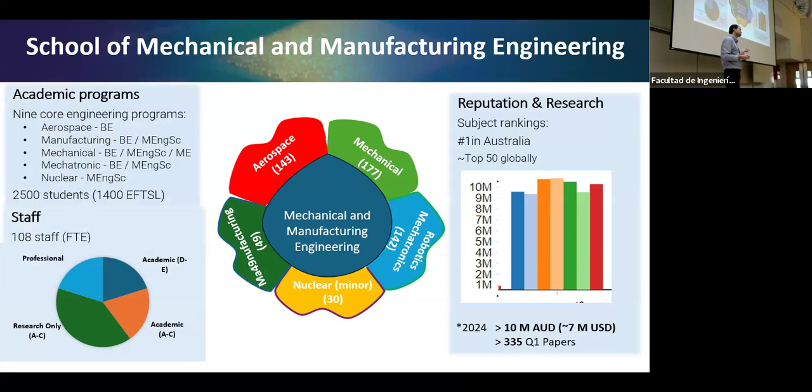It also turns out I'm the deputy head of school, so I'm sort of in charge of organizing the research for our department. I have to keep track of those numbers and statistics. We're also ranked highly in terms of our different subjects - these are the subject rankings. We're ranked somewhere in the top 50, 40 to 60 on average in terms of those mechanical engineering subjects, so that's pretty good. And within Australia, we're probably number one for mechanical engineering.

The way that our program works is interesting to compare to the Chilean system, which I heard used to be 6, 7, 10 years sometimes if people get delayed, where our degrees are 4-year degrees. The first couple years are fundamentals, and then people specialize within those different majors that I discussed.

We try to get students as much hands-on experience as possible, especially for mechanical engineering, where you should be doing some hands-on work, I think. The way that we do that is with big projects. So we have a lot of these student projects. Just a few of the pictures there.

There's a project now to build a nuclear fusion reactor, the top left thing. There's a rocketry team. We have students building robots, mechatronics students. There's some flight simulator thing, and all the students in aerospace eventually go and do some flight training. We have a Design, Build, Fly airplane team, a solar car, and a Formula SAE racing car.

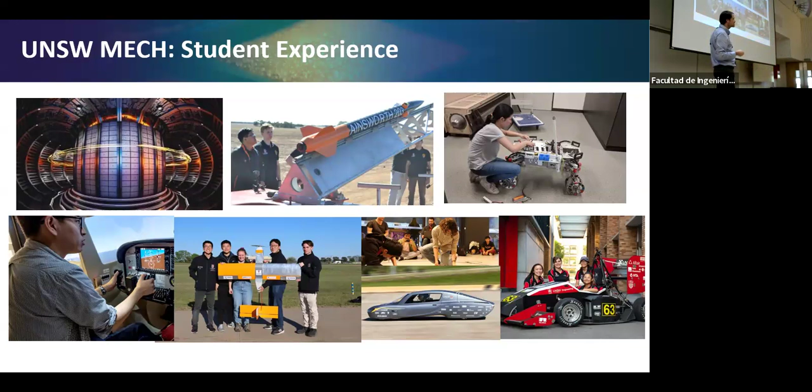The thing that I'm involved in most is the solar car. We had a solar car race last year. I went along with the students. We camp out in the outback of Australia. It took about 5 days to go from the north of Australia to the south. It turned out we got first place in our category, the cruiser class car.

You can't see it here, but there's solar panels on the top of the car. Mostly this car, because it takes passengers, is a larger, more regular car than those original solar cars. It's more like an electric vehicle, basically, but it does have solar to supplement what you get from the electricity off the grid.

The students build that themselves. They do all the carbon fiber, design all the parts, 3D print some things, doing all the manufacturing as much as possible on campus and sometimes with the partners. And then in terms of our research, we have a lot of partnerships with lots of industry partners.

Australia doesn't have wonderful industry in terms of doing research and development, but we do have a little bit, and there's a few companies interested in doing things which we partner with to advance their technologies. I think probably similar to Chile's industry, people just want to dig stuff out of the ground and make money, and they don't want to do a whole lot of development because it's easier to just do things quickly. So it is a bit of a challenge to get industry involved in research, but we do manage to get quite a bit from different things.

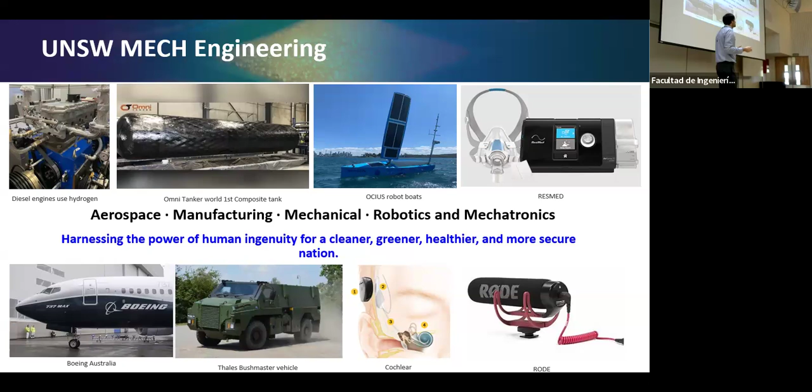But what I mostly wanted to focus on today was solar energy, and that's my area of research. My university is very famous for solar energy, especially with the photovoltaics department - they set a lot of world records in terms of photovoltaic cell efficiencies. Back in the late 80s, early 90s, almost all the silicon photovoltaic record efficiencies came from my university.

But there's been some more recent things in the last few years on different types of solar technologies, where we're still setting world records. In fact, almost all the researchers that were there back then—there's a guy named Martin Green, who's very famous—are still at the university, still supervising PhD students and doing stuff like that. And what people may not know so much, because it's not as famous, is that almost that whole time there's been solar thermal research, which is more like my area.

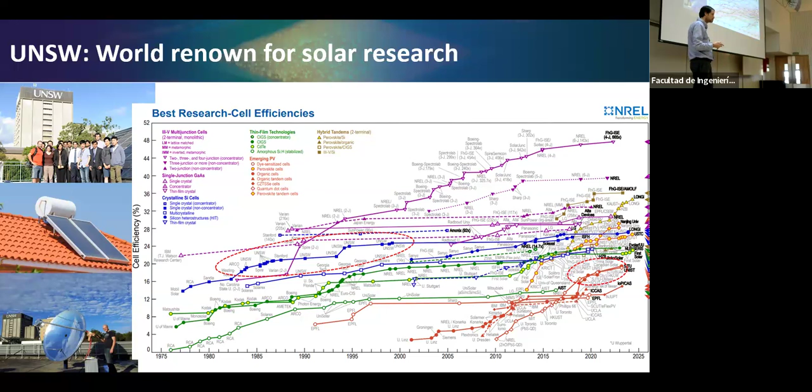There's been a solar thermal lab since the 80s there, and we have rooftop testing capability. We've tested all kinds of technologies, from low temperature things like making hot water, all the way up to high temperature materials processing things, which I'll show a little bit about later. So it's a long history of solar energy research, probably one of the most famous things at the university.

So the solar opportunity—the reason why I'm excited about solar energy, and hopefully after this you'll be excited too—is that it's a huge resource. Something like 10,000 times our global energy demand is available from solar resources right now. So we don't need to harvest even 1% of that resource, and we could grow our economy even more. It's interesting to think about, because if you think about fossil fuels, there's not a whole lot more room for growth. If anything, we need to stop using that energy because it's harming our planet. But with solar energy, we could keep growing and growing for generations and keep harvesting more of that resource. We've got 10,000 times more there to work with.

In terms of where those resources are, you guys here in Chile are very lucky—you have wonderful resources, a good place for concentrating solar thermal plants, solar PV plants, and the same in Australia. But there's one challenge: people don't necessarily like to live in the places with the best solar resources, because it's hot, dry, no water, hard to do agriculture. So I think even in Chile, this northern part of the country is not very populated. Most of the people are down here by Santiago.

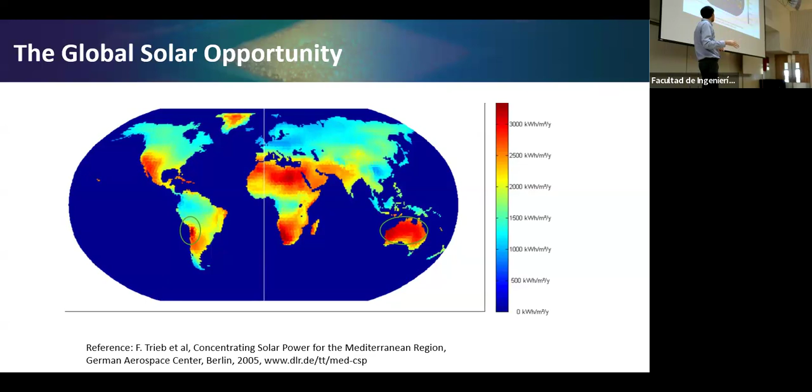So you're going to have to think about how to get that solar resource to the people, because that's where we're going to consume it. And definitely in Australia, this part of the country—all that red—looks so good, but nobody lives there. That's where our solar car race went through, and I can tell you there's nobody there. If your car breaks down in the middle of the country, there's no help coming for you.

And I think you can probably make a similar case in Chile—if it's a mining economy, why not mine the solar resources, put them into something you can export to people, maybe get things up into other population centers. So I think there are some good opportunities for solar resources if we can find good ways to embed that energy of the sun into things besides just electricity.

Most people, whenever they think of solar energy, think of electricity. But if you can embed it into some of the minerals processing steps that take a lot of energy, that's like exporting your solar energy. Or if you can store it in some kind of fuels—this last week I was at a conference where a lot of the talk was on hydrogen and ammonia. If you can put solar energy in and produce those fuels, you can then transport them and sell them somewhere else.

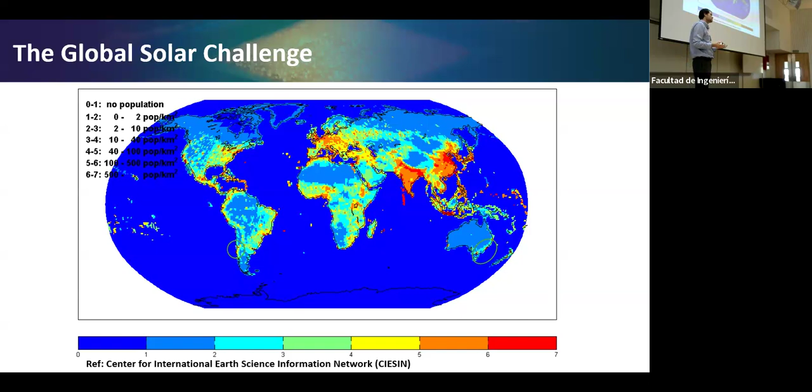So they're thinking, again, Australia is thinking to make hydrogen and transport it up to Korea and Japan. I think that's a great idea, but it takes a lot of research and science development to make that stuff happen. So I'll tell you next about some of the work I've been doing in those areas, and maybe some of the collaborations I think could be good between Australia and Chile.

So we had this project for the past few years. It's sort of finished now, but our idea was to use some biomass that's readily available in Australia, which is sugar. I think another product in Chile is the sugar industry, right?

In Australia, we have a big food and beverage industry which takes sugar in, and there's a lot of waste sugar in their waste streams from these plants. And of course, we have solar resources. So if you can take that sugar biomass, sucrose, and solar energy, and eventually turn it into something more valuable that can be transported as a fuel, then you've got something interesting.

So this project was trying to figure out the best way to do that. What we came up with was a two-step process. The first step is a thermal process. But before that, you've got to collect the sunlight, so we did a little bit of development of the solar collector. Then there's a thermal step and an electric step, and both of course could be powered by photovoltaics. We thought it would be easier to control the processes if we did that.

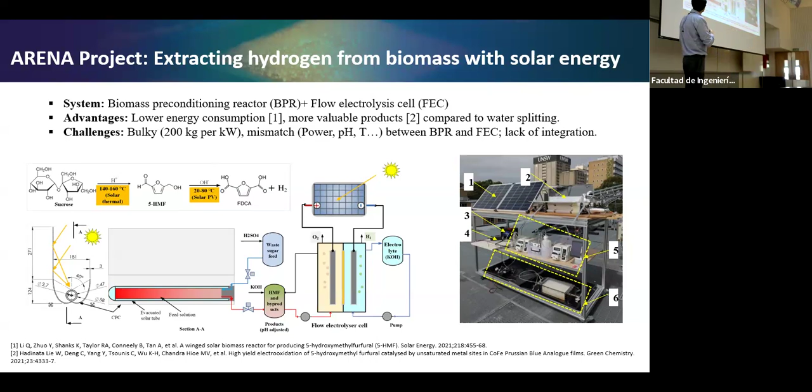There's some papers I'll be citing along the way. So I'll just take you through a little bit about the design of each of those parts.

The first part of it, which is mostly my area, is the solar stuff. What we realized was, to do this thermal process, you have to get up to a medium temperature - about 150 degrees is a good temperature to get that thermochemical reaction to work. To get to 150 degrees, you need a little bit of tracking and concentration of the sunlight. But we didn't like the idea of using standard stuff with 2-axis tracking, because it would be expensive and hard to integrate. So we went for this unique design, which we called a winged CPC.

So the CPC is a compound parabolic concentrator. The advantage of a CPC is that within a certain acceptance angle, all the light that comes in from any angle - as the sun moves through the sky - as long as it's within those acceptance angles of the CPC, it'll bounce around in these mirrors and finally make it to the tube receiver at the end. You can see some ray tracing results here, where we simulate the sun in a model, send some rays down, and it bounces off the wall, bounces over, hits the tube, and gets absorbed. It doesn't matter, as long as it's within that acceptance angle, it still works.

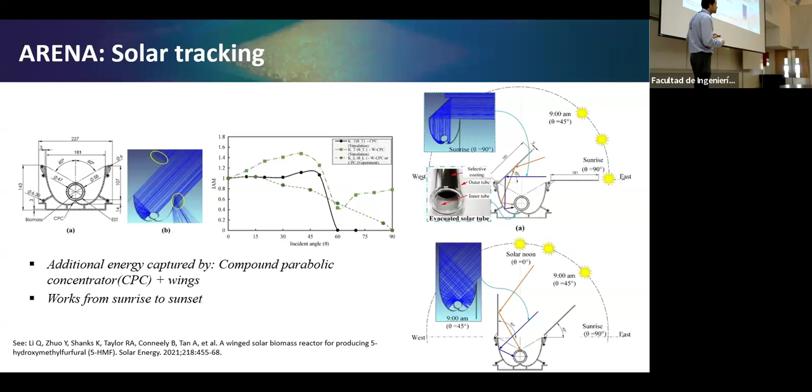So then the next step was doing the chemical testing, thermochemical testing. We put this thing out in the sun. So that's kind of what it looks like now. You see blue everywhere here - that's the color of the selective surface in the tube.

If you look down from straight above, it looks huge, but it's really just a small tube that you're seeing, and all the light is going into that tube. Then we put the sugary biomass, the Coca-Cola, into the tube. Unfortunately, one of the key things about this is it's an acid

catalysis process. So you have to put a pretty low pH in there for this process to work well, or at least to get to the lower temperatures. So it's a pretty strong acid.

Also, it needs to be pressurized because we're going above 100 degrees Celsius, and aqueous Coca-Cola will boil normally. So we put it at 5 bars pressure.

So anyway, we thought we could just do that inside the tube, and the manufacturer said you could just pressurize the tube, but we were cracking some of our tubes. So we had to redesign it a bit with a titanium U-tube, which holds the pressure on the inside. But anyway, we did some tests.

It turns out that over time, of course, the thing heats up and you go through lots of chemical reactions. So you actually have to stop the process somewhere along the way at the right temperature and the right amount of time to get the maximum amount of this 5-HMF, which was our target product.

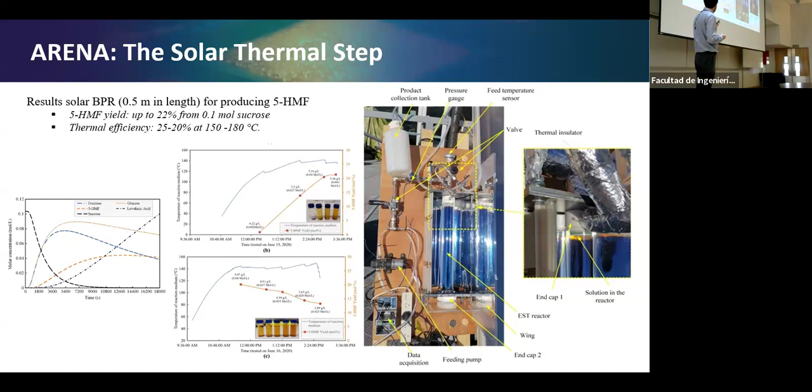I think you could get the yield up quite a bit. But the thermal efficiency, 25%, that's a little bit low. It's not bad for this temperature, but that's of course accounting for the whole solar resource as the denominator of the efficiency, and then the useful heat extracted as the numerator. So yeah, anyway, that's the result.

The next step, once we have what we want, which is this 5-HMF, we can flow those products into this flow electrolyzer cell. And inside of that, if you want to be off grid, it turns out to be an electrical engineering challenge where you've got to get a match between the photovoltaic current and voltage you're getting from the photovoltaic cells and these electrolyzer cells.

The electrolyzer cells would like to have very high current, and photovoltaic modules normally give you very high voltage. So what you have to do to get a closer match is put the PV modules in parallel, and then put the electrolyzers in series. If you do that, you can get it to be pretty close, because you want to get towards the maximum power point of the photovoltaic modules, and you also need to get enough current into these cells to make them work.

Also, whenever you put in that 5-HMF, it's actually a lot lower energy, about 25% less energy than just trying to split water by itself. So there's an advantage to doing this, a big energy savings, to have that intermediate chemical in there.

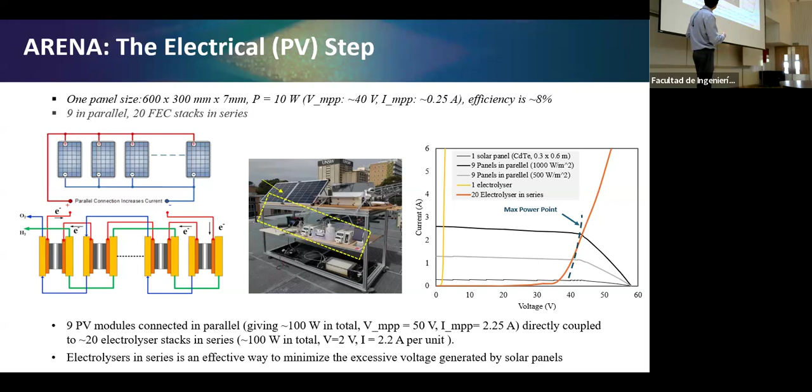Anyways, that's the design for that. Of course, the parts of that, like the stacks, can be down below - they don't need to be in the sun, just the PV module needs to be in the sun. So it's kind of large, a big cart, but you could imagine making a nice product that was all integrated, with the solar out on top, and everything else inside a controlled cart for environmental control, because there's a lot of electricity in there.

We only tested on sunny days. If you were out in the rain or something, you'd need to be protected from the wet weather.

So the overall results of this is basically we built this kind of prototype system, which was about 2 square meters, 300 watts of thermal input, 100 watts of PV electricity, and then it all was matching and giving a nice kind of continuous product.

There's a paper on it if you want to know more details. But it turns out it's pretty interesting engineering design - we didn't think of all the stuff when we started. We just thought, oh, this will work. But actually, when you get into the details of stuff like this, you have to do a lot of redesigns and a lot of playing around with different configurations, and operational conditions are very important.

So in terms of the economics, we did a little bit of economic analysis, which is in this paper. That FDCA is the most valuable thing. You might also get paid to take that waste, sucrose, because it's a trade waste that they have to pay to dispose of.

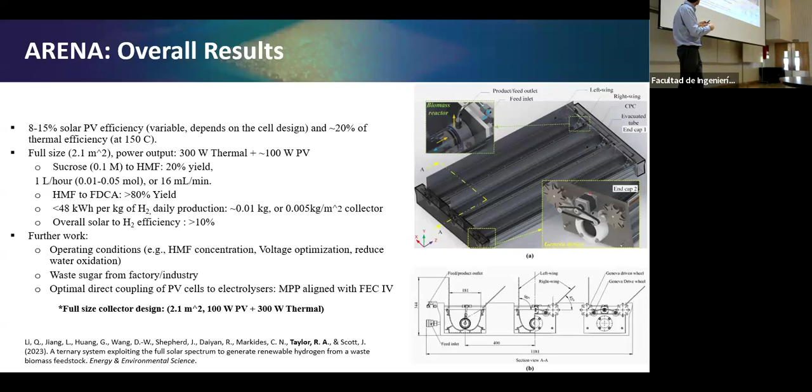Okay, so you may have noticed the way that system worked was the thermal system was separated from the PV. Some of my work, a good amount of it over the last few years, has been trying to bring those things together and make the PV and the thermal integrated. So I'll probably talk about a few ways that could work next.

So why would you want to do this? Well, the first reason is that if you think about a PV module - I don't know if any of you guys know much about photovoltaics - there's a certain band gap. So for silicon, 1.1 micrometers is the band gap. So anything that's lower, any of the photons that are lower energy, which is the infrared part of the spectrum, they won't do anything for you for your silicon PV module, and they just kind of, if they get absorbed, turn to heat.

Then for the short wavelength stuff, like the blue light and the purple light, it has way too much energy for that band gap. So when you get to blue light, you actually have 3 times the amount of energy that you need in that photon to make the electron jump across to the conduction band. And since it's 3 times as much, only one part of the energy is going to creating electricity - the other two parts turn to heat in a process called thermalization. So basically, only the red part of this curve is good for the PV.

The rest of the solar spectrum, which is landing on the ground, just turns to heat anyways.

So that's 80% of the solar energy landing on a PV module that's just turning to heat. So why not capture that heat? That's kind of a theoretical argument. And where does it make sense?

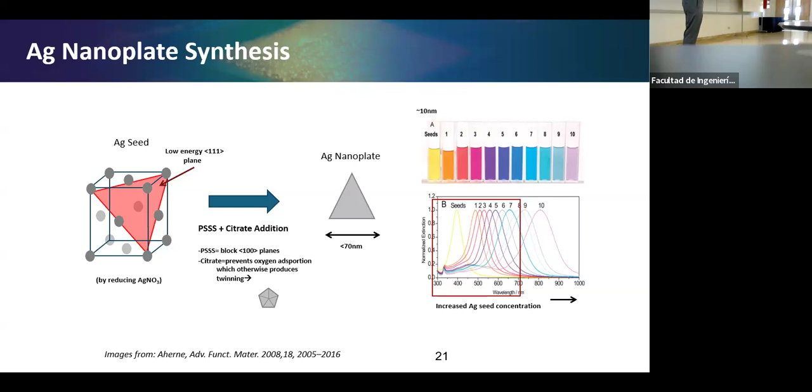There was a good PhD student from material science working on developing these, and you've got to stop the reaction at the perfect point. It turns out you want something kind of pinkish in color in the end. We started with little batches of these things and eventually scaled it up to make several liters. Of course, a lot of science went into the temperatures, times, and concentration of the reactants. Eventually we got something we thought was good enough to test in the sun.

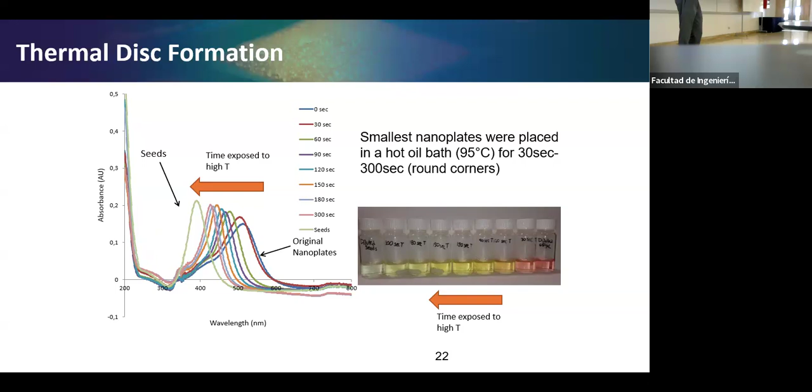Again, a lot of design went into this. We had to develop some of our own electronics to do the IV testing of the PV cells. It turns out you have to cool the PV cells because of the concentrated light on them—you don't want them too hot, or efficiency goes down. Designing this whole thing and tracking it out in the sun was good work for a couple of PhDs to develop and test that system, and we got very good efficiencies out of it.

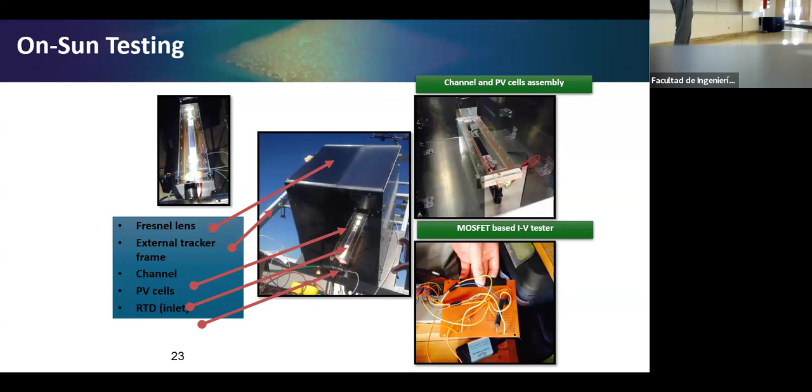So the next bit of work, ongoing now with a master's student, is to use almost the exact same technology, but maybe make a spot focus to get an even higher concentration ratio instead of a linear focus, and then spread the light back out so it's one sun again for the PV module. Then we can use a regular PV module at 20 cents a watt, and get an even higher temperature from the fluid. So we're designing this little receiver, which is going to be kind of circular. It turns out we want to mix up that fluid and make it all the same temperature. We don't want any hot zones, and we definitely don't want to crack our window or have a lot of heat loss.

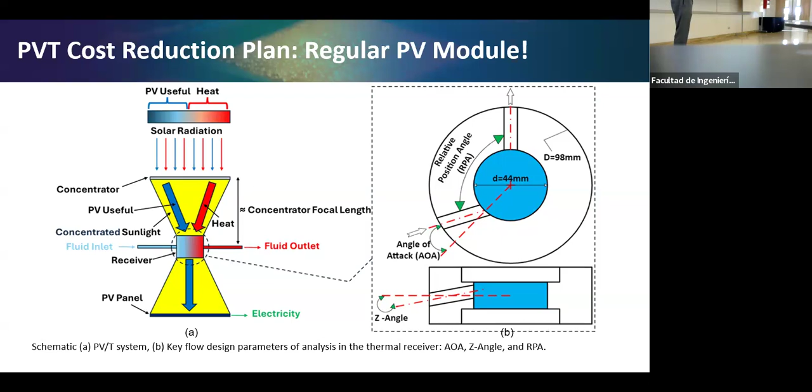So then there's a bunch of design choices, like the inlet. If you take the fluid and flow it straight through the middle of a circle with sunlight coming in, you get some dead zones on the sides that are hotter than other parts, and it's not very good mixing. If you put it at 90 degrees, you get some swirling and mixing, which is good, but it doesn't always do what you think it's going to do. We've been doing CFD, computational fluid dynamic simulations. Another important thing is the angle of the inlet - you want it to hit the window first and take away the hot part of the fluid that can get stuck there.

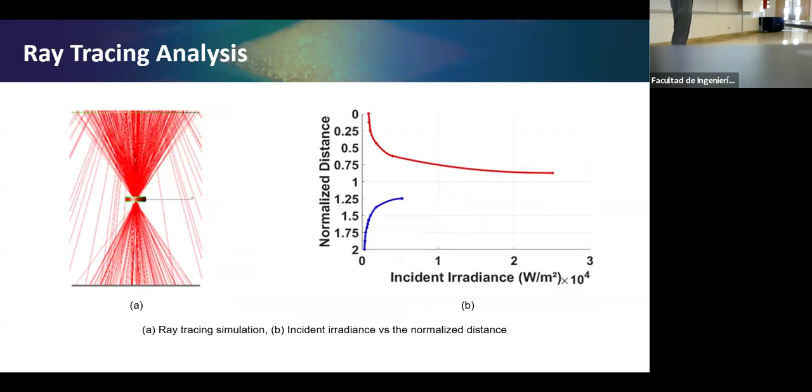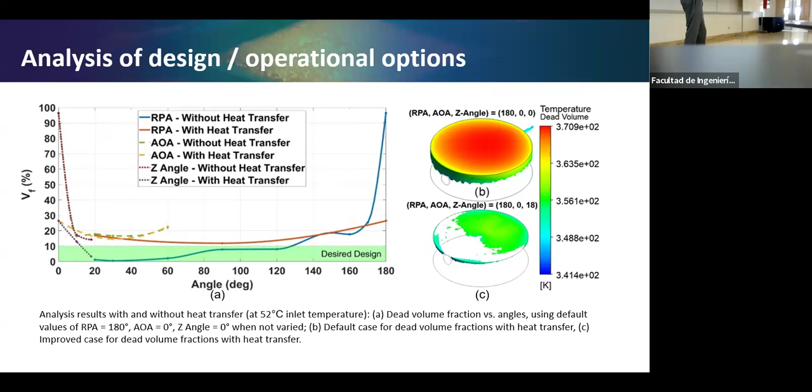So we've been playing around with different designs trying to come up with an optimum, and the next step is building the rig to test this. This is ongoing work - we haven't got test results yet, but we're building a very similar rig to what I showed earlier with the concentrator, and we'll put this in the receiver, with a PV module down below.

Okay, one last project idea we worked on with another PhD student, still PVT, but this time for the thermal part, is to do some minerals processing. We had a project on a big minerals processing industry in Australia: making aluminium. You start with bauxite, the raw ore, and turn it into alumina. That process has a high temperature step, a calcination step, needing about 700 degrees Celsius. You're really just stripping out some hydrogen and turning the bauxite into alumina. There are a lot of interesting parts of that process, but one thing is if you go very fast with a high heating rate, you can make certain phases of alumina which are more desirable.

If you go too slow, you get on another track and you get less desirable phases of alumina. So we're after the gamma phase alumina, not the alpha phase. Anyway, there's a lot of ways to do it.

Traditionally, the way they do that calcination step is with gas. They burn gas and can get very high heating rates.

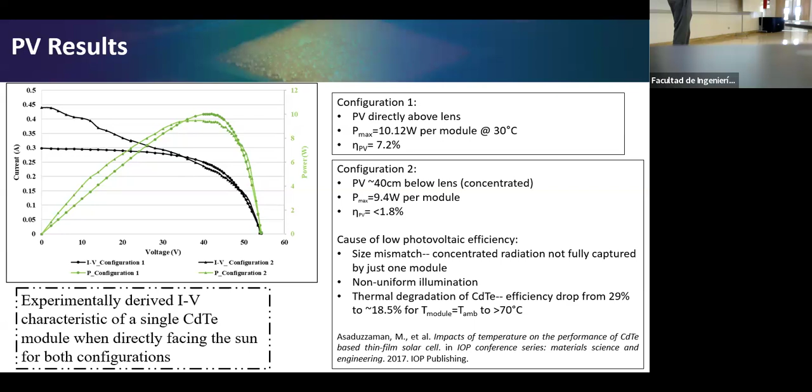In terms of what happens to the thermal reaction afterwards, we still get pretty good heating. The above-the-lens configuration, we could still heat it up to maybe 450 Celsius. The below-the-lens configuration was able to get to 650. So unfortunately, at least with our setup, we weren't able to get to that 700 calcination step, but it's not far away. With some supplemental heating or maybe a little better design, we could still do that calcination step and get 7% efficiency from the PV cells.

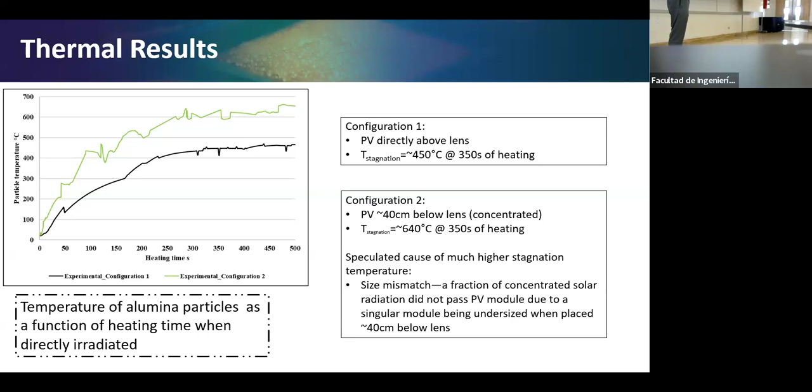That's a little bit of ongoing work too. But I think some part of the aluminium processing is going to eventually need to be solarized, and I think the PVT might be an interesting way to do it. In terms of PV efficiency, the best design is 7.2%, and the thermal efficiency is somewhere near 10%. So you could add those two together and say 17% of the light is turned into useful electricity or into the thermal reaction.

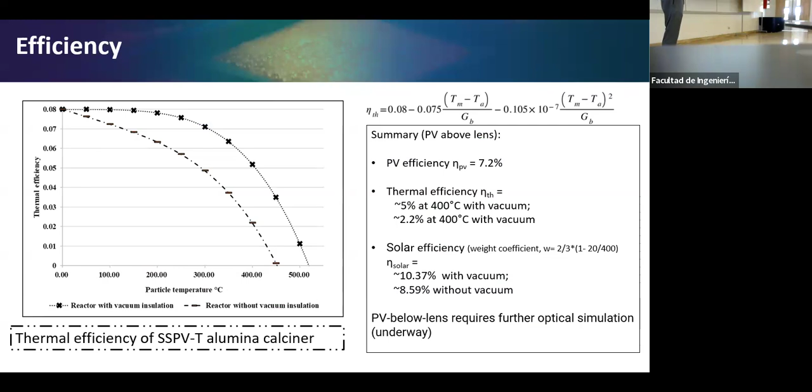One last topic I thought I'd talk about, because I think it's interesting. There's some people working on different technologies around this, but you don't necessarily need to do PVT, you can do PV to T. So you could just have PV modules and then turn them into thermal energy. I think that still fits within people who have expertise in heat transfer and thermodynamics, which is my background.

One very low-hanging fruit for that is making hot water. I'm managing an International Energy Agency task where part of it is looking at what are the best ways to turn PV electricity into hot water. Whenever we got going on it, we realized there's a lot of technologies in there, and they're all emerging, and they can solve some of the challenges that both Australia and Chile are facing.

I saw some news that there's been a lot of curtailment of PV electricity in Chile recently. Many megawatt hours are just not being used from the PV because you have excess electricity during the middle of the day generated from the solar, and then you just turn it off. So it's a waste of electricity. Same thing in Australia - there's parts of Australia, like South Australia, where the price goes negative at some parts of the day, and so you actually get paid to either turn your thing off or take electricity from the grid, which is kind of funny.

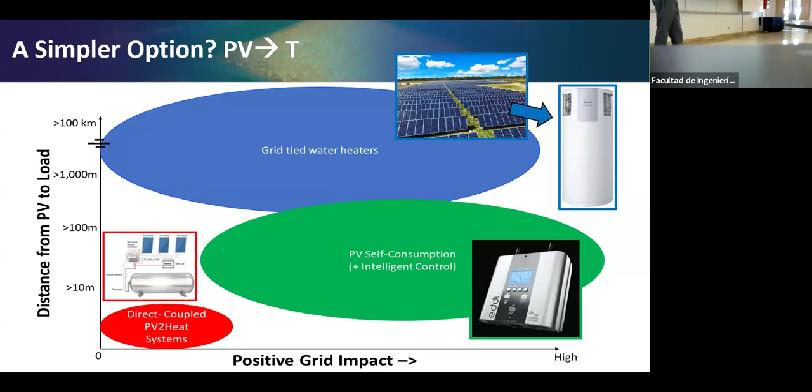One of the main reasons why I think the grid integration stuff is really interesting for developed countries is that the average household uses about 6 kilowatt hours of hot water energy per day, and there's about 1 billion hot water tanks already installed across the world. Multiply those together, that's 6 billion kilowatt hours of energy storage capacity that's already installed. That's going to be way cheaper than buying batteries, or doing some fancy phase change thermal storage. These hot water tanks are already there - we just got to figure out some smart systems to use them.

So anyway, that's the other kind of PV to T technology that I work on.

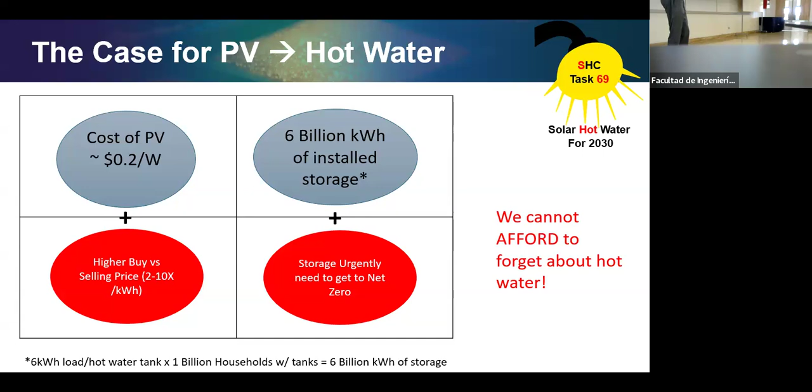People always forget about hot water whenever they make building energy efficiency codes, standards, regulations, and even incentives. Hot water systems always get left off, but it's a huge thing. Also in Australia, I don't know if it's the same here, if you export your electricity onto the grid, you get a lot less than what you get if you buy it from the grid. So your selling price is way lower than the buying price, so might as well use it in your house.

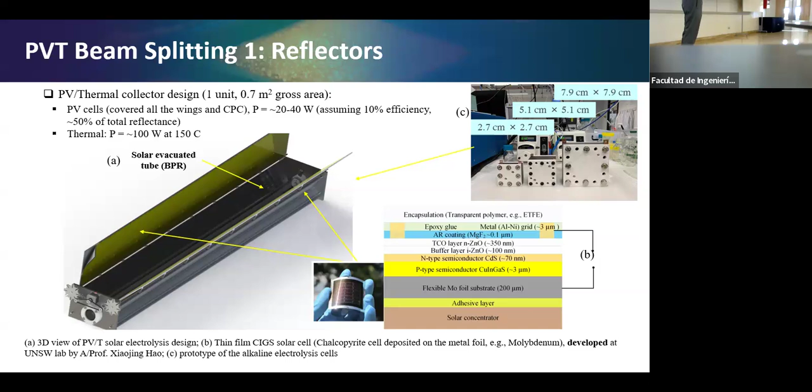So it's the same idea, I guess. For cancer treatments, I have a bit of work on that too. What you want to do for those is just absorb in that therapeutic window, which is a bit longer wavelength, and you don't really care about the other stuff. So there's many ways you can make that: rods, gold rods, maybe some core shell particles give you that absorption, high absorption in that little window. And basically the window is where your skin transmits the infrared light.

So that's usually what they're trying to do there. But our objective was a little bit different. We were trying to absorb some short wavelength and some long wavelength. So we had to come up with a little bit different design. We ended up using silver, which you wouldn't use in the body since silver's a little bit toxic. Gold is a nice noble metal, but silver and discs of silver really make these kind of sharp peaks where you can have really well controlled optical properties.

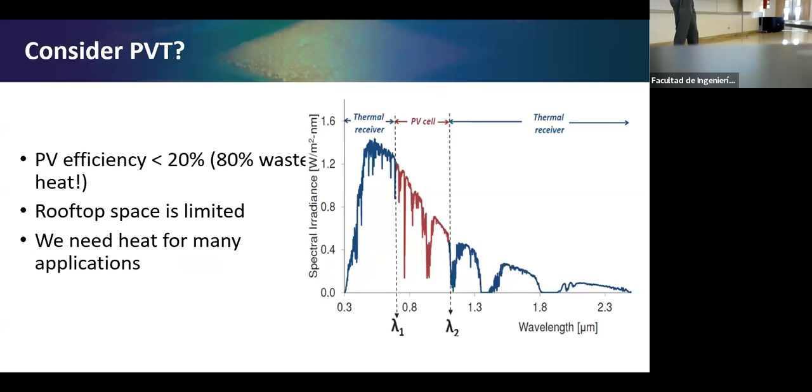Yeah, okay, maybe that's fine. And you used cadmium telluride as a PV cell? What made you try that instead of the traditional silicon based approach? So that's sort of the innovative part - where is it? It's back toward the end.

I guess the innovative thing for that one is we wanted to transmit the light through the PV module. I've done all kinds of PVT technologies - one of them is just a thin film with a reflector, so it's kind of the same thing, transmitting light through the thin film and bouncing it off the reflector. This one, we had the concentrator, and we wanted something mostly transparent that light could pass through.

There are silicon modules with some semi-transparent silicon where you cut the wafer really thin, but you need a certain path length in the silicon to absorb the photons, so it's not a good choice for transmitting light usually. It does transmit infrared, but with the back contacts and other parts of silicon modules, it's not necessarily the best choice for what we were doing.

But the cadmium telluride - is there a good picture of it? Anyway, it looks like a glass window almost. It's very transparent - you wouldn't even know it was a PV cell by looking at it.

Okay, in the front. Thank you, Robert. I have two questions.

One is which of these prototypes have the best combined PVT efficiency? And the other one is, considering all the products you can sell, the co-products, which has the best levelized cost, and considering these incomes, have you calculated that?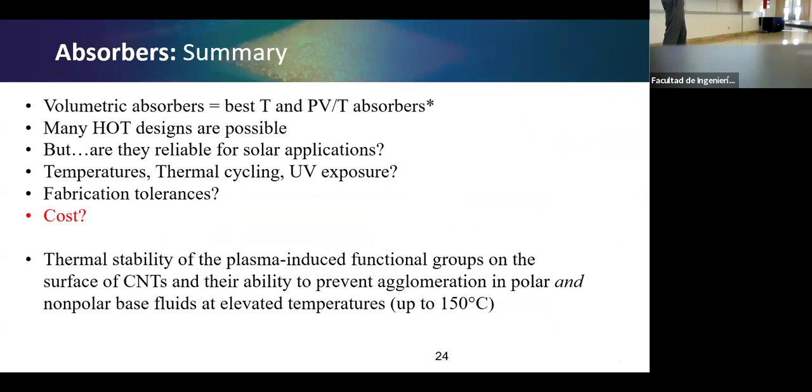Okay, so for the first question, the best efficiency, I'd say this system had a pretty good efficiency because we got pretty good control of the nanofluid properties, and we got high thermal efficiency. We operate this one at lower temperature, especially if we're using water, we keep it below 100 Celsius, and that makes the thermal efficiency higher. And then the PV can be pretty high efficiency too. So that was probably the best. The overall combined efficiency was probably close to 50%, something like that.

And then the second question. Yeah, I'd probably have to go back to these, I have several papers on this, some more recent than that one. But anyway, we did the fluids, the nanofluids, even though it's silver and you'd think it would be expensive, it's $1 per liter. And it's a closed loop, so it's not like you're throwing it out, you just use a heat exchanger. So $1 per liter for that.

If you could use regular PV, which I hope to do next, that's 20 cents, less than $1 per watt definitely. And if you don't try to make too much concentration, I think the concentration system could be like $1 or $2 per watt.

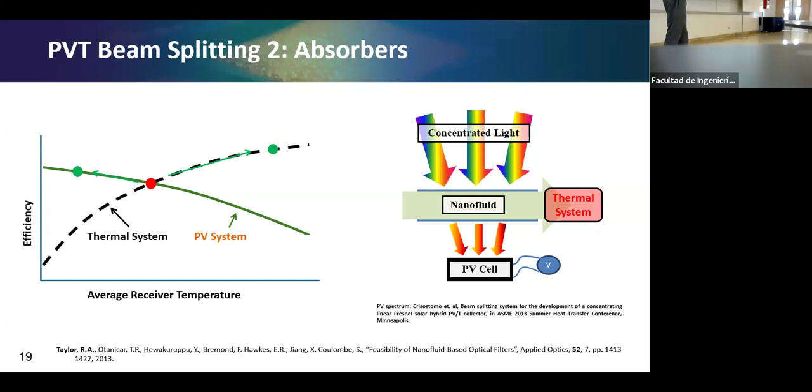And when you use the aluminum project? Yeah, it's the same thing, I mean they would be putting gas in.

Yeah, I guess our basic concept for this is probably these processes are massive, like Rio Tinto or Alcoa, the big company that makes aluminum. They just have a huge energy demand. We're probably not going to offset all of it, but if the stream of the flow of the product is going like this, and we take a cut out of there, use solar energy, maybe someday you could get a few percentage of their flow through a solar receiver. When there's sun, you just run some of the flow through this thing, and instead of using gas to process that, use the solar, and then they're saving some gas.

I think there's value beyond just the energy savings. These companies can say they're going towards being a sustainable company, and get some social license to operate these energy intensive processes if they're at least trying to be more sustainable. They also save carbon emissions, and if there's a carbon price, some countries have a carbon tax or cap and trade, so they could get value from that as well.